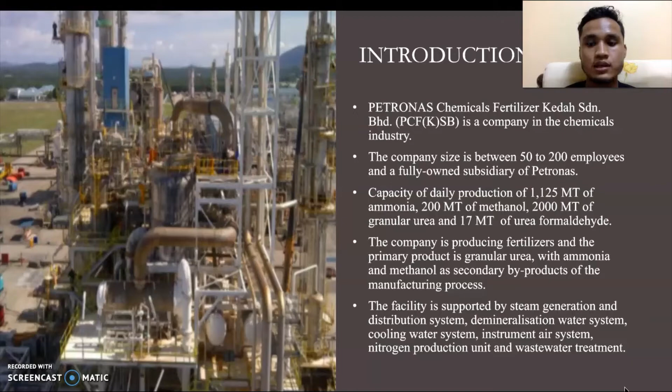Okay, moving on to the first scenario, the potential events due to ammonia release in air were toxic release, flash fire, and explosion. The model used for this scenario was direct source, assuming the ammonia reactor failure was due to failure of safeguarding equipment. For the source strength, the source height is 2 meters, the source temperature was equal to ambient temperature, and the release duration is 60 minutes, with the amount of ammonia released estimated at 1 kilogram per minute, and a total amount released of 60 kilograms.

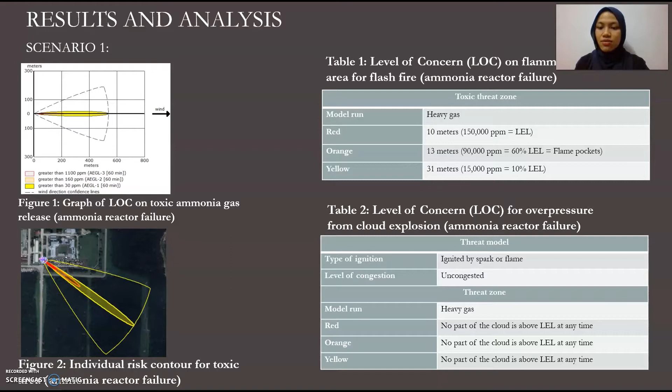So we proceed with table 2, which is the level of concern for overpressure from vapor cloud explosion. For the threat model, the type of ignition is ignited by spark or flame, and it is uncongested. For the threat zone, the model run is heavy gas, and for the 3 zones, which are red zone, orange zone, and yellow zone, no part of the cloud is above LEL at any time.

The next release scenario is the chemical release from a leaking tank. The two chemical releases that affect humans and the surroundings are ammonia and methanol. So scenario 2 has two parts. The first part is for methanol and the second part is for ammonia. For methanol, there are three possible events, which are toxic vapor gas release, flash fire, and explosion from flammable vapor cloud.

The calculated total amount released was 43,000 pounds of methanol with a maximum average sustained release rate of 900 pounds per minute. The methanol will escape as a liquid and form an evaporating puddle that spreads to a diameter of 89 yards. The tank has a circular opening with a diameter of 50 cm and an opening height of 5 meters for the hole in the tank.

So this is the result from ALOHA. The LOC for toxic gas release of methanol through a leak from a hole in the tank is 223 yards for the red zone, 497 yards for the orange zone, and 1,185 yards for the yellow zone. And this is the figure from ALOHA and the figure from the plot.

And the next event is a flash fire. So this is the result from ALOHA. The LOC for flammable area for flash fire for the red zone is 48 yards and for the yellow zone is 223 yards. There is no red zone shown in both figures due to its small area.

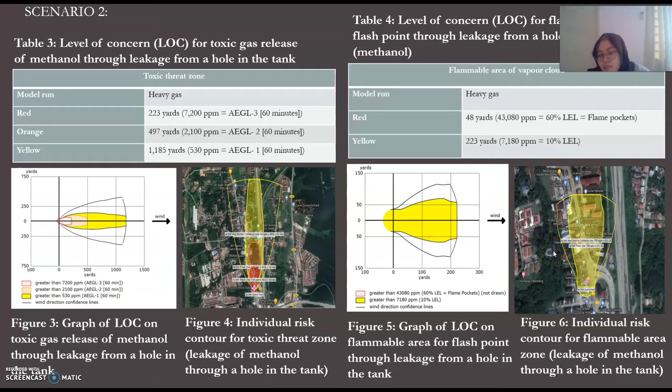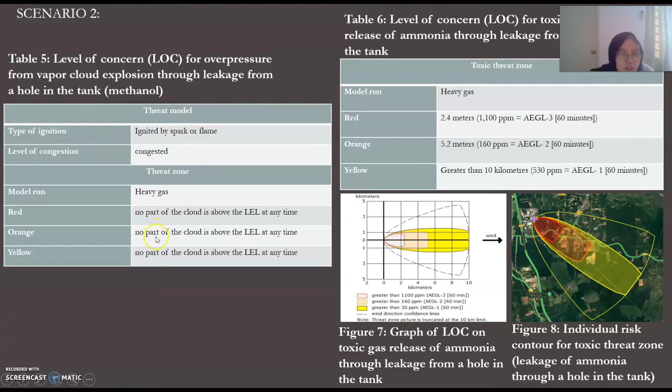Next is the last event, which is the blast or explosion from the vapor cloud. And it seems like there is no blast from this scenario for methanol because there is no part of the cloud that is above the LEL at any time. Actually, the second scenario can happen in the ammonia tank as well.

For source strength data, the ammonia tank has a volume of 50 cubic meters and the circular opening diameter was estimated to be 0.0762 meters, and the opening height is estimated to be 0.5 meters from the bottom of the tank. Okay, so the ammonia leakage has resulted in toxic ammonia vapor spreading to the nearby area of the tank. The gas has a toxic effect that could cause fatality incidents in the area affected.

The toxic threat zone for the toxic gas release from ALOHA is listed and illustrated in table 6 and both figure 7 and figure 8. So we can see the toxic threat zone. The model run is heavy gas and the red zone is estimated to be 2.4 meters with 1,100 ppm, which is equal to AEGL-3 in 60 minutes.

The orange zone is 5.2 meters with 160 ppm, which is equal to AEGL-2 in 60 minutes. And the last one is the yellow zone, which is greater than 10 km, with 530 ppm, which is equal to AEGL-1 in 60 minutes. So we can see this is the graph of LOC on toxic gas release of ammonia through leakage from a hole in the tank, and figure 8 shows the individual risk contour for the toxic threat zone.

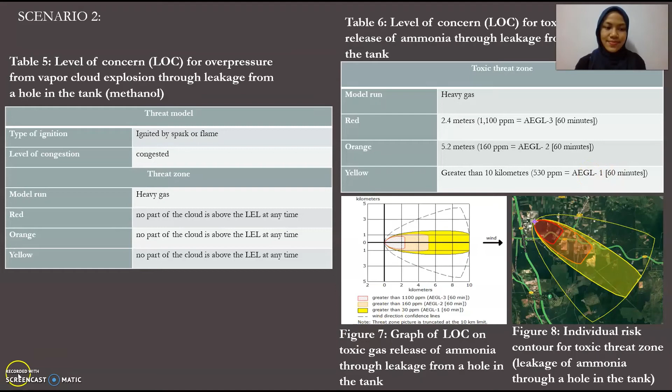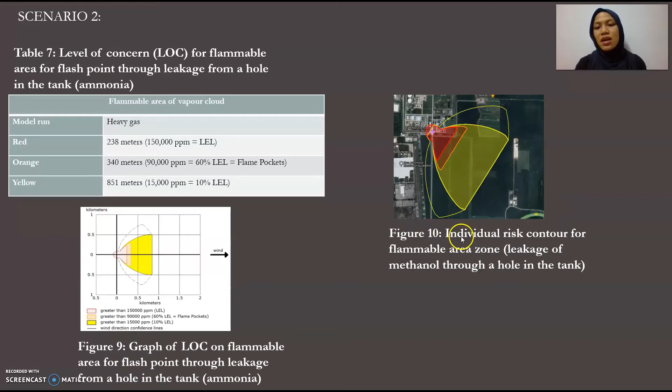The orange zone is estimated to be 340 meters with 90,000 ppm, which is equal to 60% of LEL and equal to flame pockets. And the last one is the yellow zone with 851 meters with 15,000 ppm, which is equal to 10% of LEL. So figure 9 shows the graph of LOC flammable area for flash fire through leakage from a hole in the tank for ammonia, and in figure 10 we can see the individual risk contour for the flammable area zone.

Lastly, the third scenario is a methanol leakage from a hole in the pipe. This scenario could be considered the worst scenario due to its huge affected area. There are again three possible events, which are toxic vapor gas release, flash fire, and explosion from a flammable vapor cloud. The calculated total amount released was 156,000 pounds of methanol with a maximum average sustained release rate of 2,600 pounds per minute. So the source strength data for methanol leakage through a hole in the pipe is a hole area of 491 square centimeters with a pipe pressure of 4 atm and a pipe temperature of 120 Celsius.

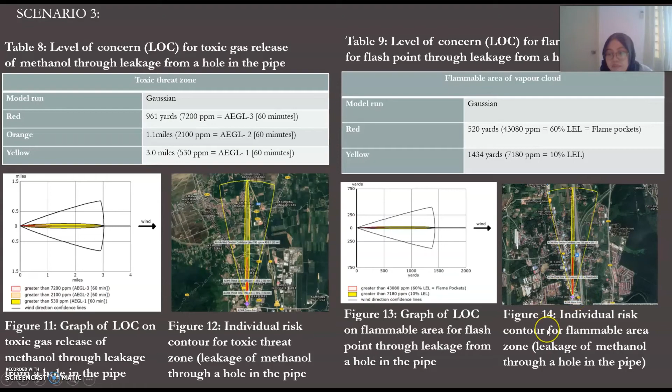And the last event is the blast overpressure from a vapor cloud explosion through leakage from a hole in the pipe. So there is a yellow zone, which is 388 yards, while there is no orange or red zone since the LOC was never exceeded.

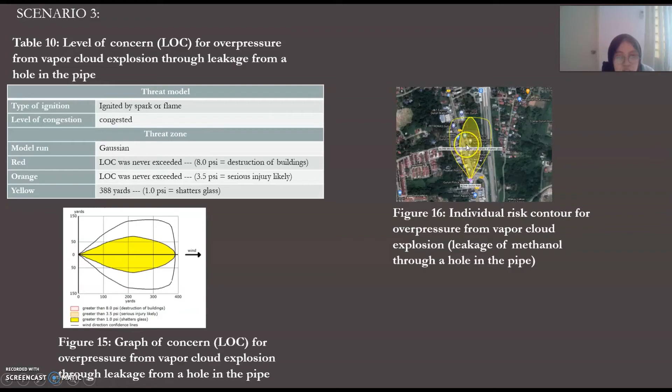Now I will explain the individual risks of our chosen facility. Our facility, Petronas Chemicals Fertilizer Kedah Sdn Bhd, handles many types of chemicals, and these chemicals need to be handled very carefully. The first chemical, methanol, is very toxic to humans if swallowed, and its vapor can also cause harm if inhaled.

Then the employees who are working to handle the methanol reactor and the pipeline need to be extra careful to avoid any hazard coming from the chemical. Methanol is also a highly flammable substance. It can easily explode if ignited, especially in a very small closed space.

Next, for ammonia, both the gas and liquid phases of ammonia are very dangerous and hazardous to humans. Ammonia is very toxic and can cause death if it is swallowed or inhaled. And ammonia is also a flammable gas where a high airborne concentration can be ignited and pose a significant fire and explosion hazard, especially in a confined space.

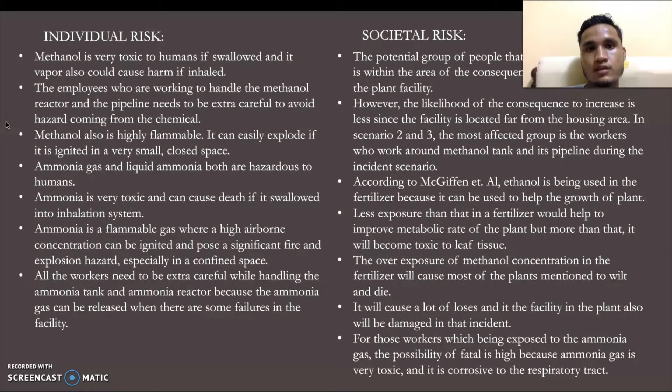All the workers need to be extra careful while handling the ammonia tank and ammonia reactor because the ammonia gas can be released when there is some failure in the facility. Okay, for the societal risk, the potential group of people that would likely be affected is within the area of consequences, which is inside the plant facility. However, the likelihood of the consequences increasing is less since the facility is located far from the housing area.

In scenarios 2 and 3, the most affected group is the workers who work around the methanol and ammonia tank and its pipeline during the incident scenario. According to McGiffen et al., methanol is being used in the fertilizer because it can help the growth of plants. Less exposure than that in a fertilizer would help to improve the metabolic rate of the plant, but more than that, it will become toxic to leaf tissue.

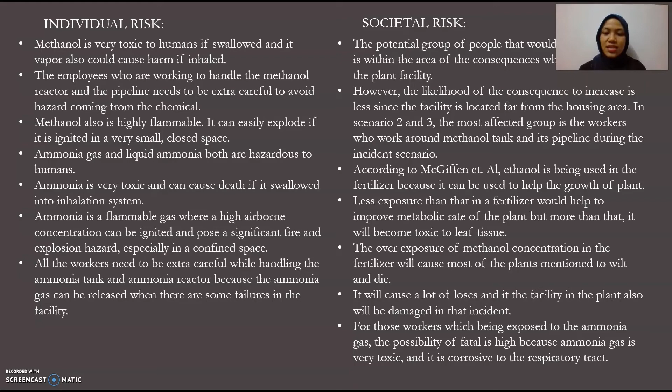The exposure to methanol concentration in the fertilizer will cause most of the plants mentioned to wilt and die. It will cause a lot of losses, and the facility in the plant will also be damaged in the incident. For those workers who are exposed to the ammonia gas, the possibility of fatality is high because ammonia gas is very toxic to humans and it is corrosive to the respiratory tract.

Okay, so next is the recommendations part. For the mitigation measures and emergency response, we provide three safety concepts. First is the inherent safety concept. Second is the gas leak detector alarm, and third is the plan of emergency response. So these three things can provide safety to the workers and people surrounding and near the facilities.

Okay, so the inherent safety concept is a design feature that can prevent hazardous situations. Our facility produces fertilizer. So the hazardous materials that we use are ammonia and methanol. Ammonia is a toxic and flammable chemical, so it is stored below its boiling point with refrigeration. This refrigeration design feature must follow the ammonia characteristics so that it can prevent undesired events.

Okay, so this refrigerated storage can reduce the release from the tank and reduce the vapor pressure of the material. By having this design feature, we can prevent the undesired event from spreading and can guarantee the safety of the workers. Okay, the next safety concept that we provide is the gas leak detector alarm. The gas leak detector alarm is a critical asset for operational safety and efficiency of plants in the industrial sectors.